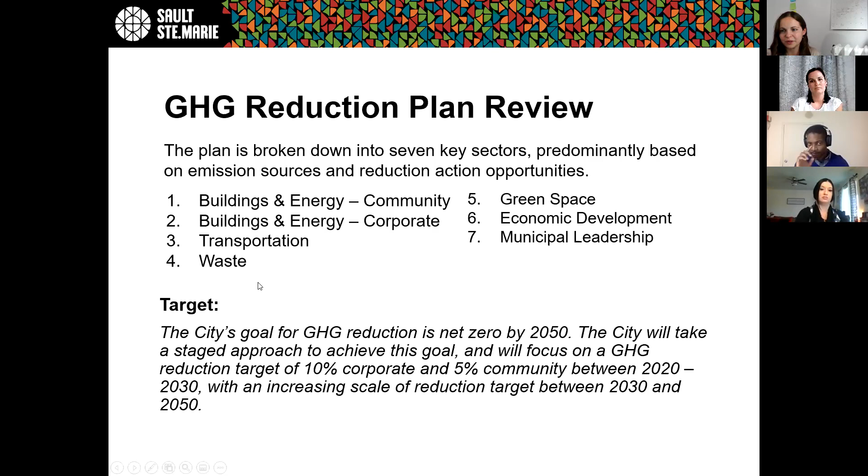A huge component of this plan relates to energy efficiency, which speaks very well to the presentation this evening. In addition to the actions identified, the plan also addresses a series of guiding principles. It speaks to issues such as affordability - when you look at reducing your energy costs, you create more economical housing. It also looks at creating accountability to ensure that we have a sustainable future for the next generations.

Education and awareness is a big pillar of the plan, which is what is so important about today. It also speaks to community pride, so by diversifying our sustainability options, we improve our community well-being. And of course, looking at clean tech and ecotourism as forms of economic development, and protecting our environment and habitat and species at risk from climate impacts.

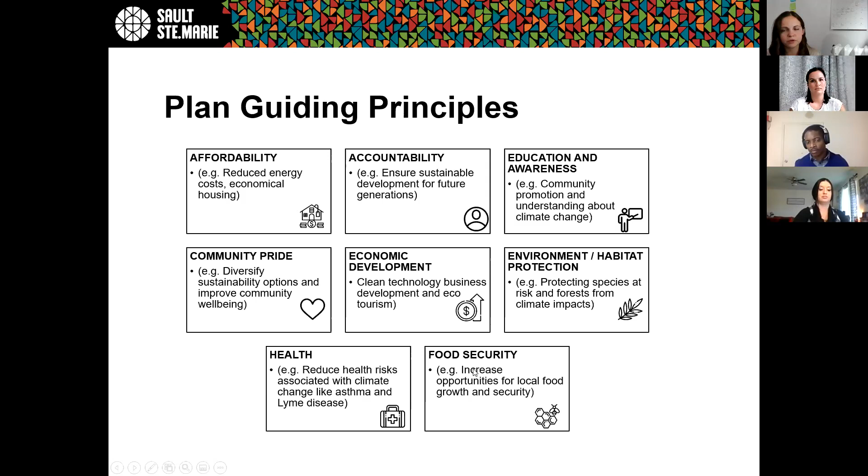Looking at health, by reducing emissions you can address things like asthma and Lyme disease, as well as food security. By growing food closer to home, you can reduce emissions from having to transport food here.

The plan is robust and has a series of priorities. This is just a high-level overview of some actions that have taken place so far. We've established an environmental sustainability committee that meets monthly and acts as the overseeing body of the plan.

We've created a climate information webpage on the city's website, and we're looking at budgeting and funding options for year one priorities, as well as undertaking a youth initiative within the community that addresses environment, and really prioritizing municipal leadership and policy changes, such as developing a climate lens policy.

On the emissions reduction front, we're prioritizing energy efficiency retrofits as well as zero emission fleet opportunities. We've summarized priorities by city department, and we're looking at increasing tree planting to help offset emissions, as well as developing a community retrofit program and streamlining our energy data tracking.

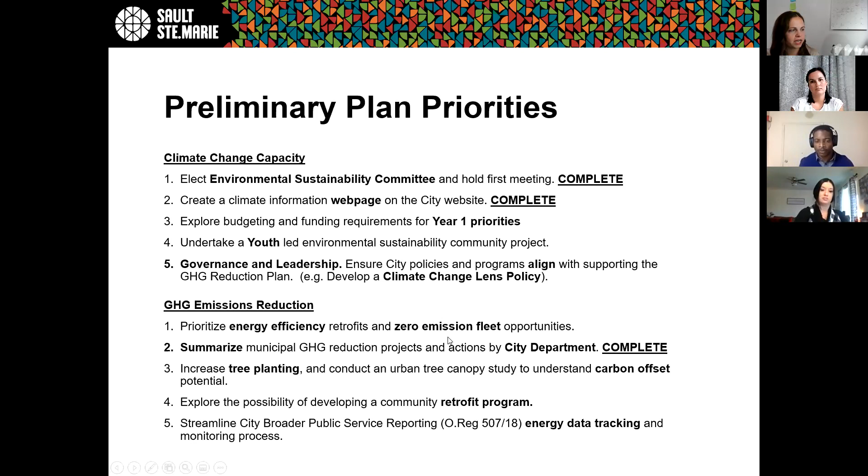Just a couple of highlights of things we're working on. The city does plan to go half electric for city buses by 2026. Next year we will be purchasing our very first electric bus and charger, as well as completing the infrastructure work. From a central administration standpoint, we are looking at installing solar panels at our bus depot for 2023.

As well as some retrofits at community centers, looking at lighting, heat recovery units, and energy efficiency equipment. From a waste standpoint, we've made changes to purchasing packages to reduce single-use packaging material, and our biosolids management facility will be expanding its scope to accept municipal source separated organics as required by the province.

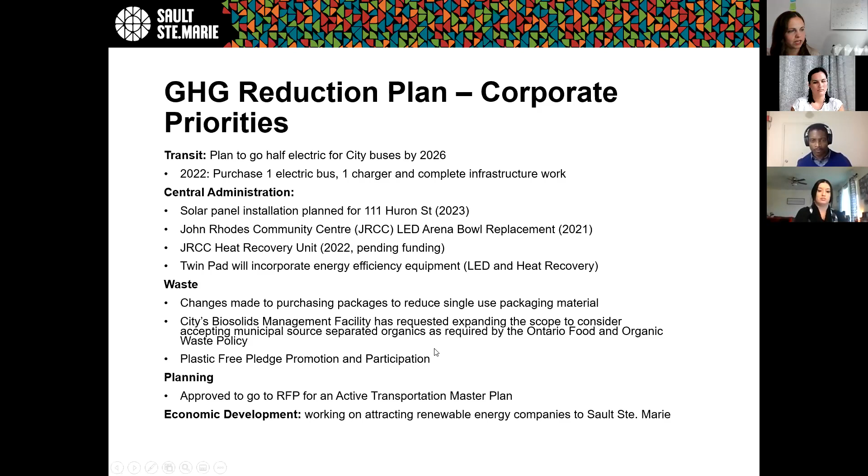We also have a plastic-free pledge, which we promote for participation within the community of Sault Ste. Marie, and we've recently gone to RFP to develop an active transportation master plan. Our economic development team is working at attracting renewable companies to the Soo.

So I know that was a lot of information jam-packed into a very short amount of time. If you'd like to learn more, I encourage you to visit the City of Sault Ste. Marie's GHG Reduction Plan tab.

So with that, I will stop sharing my screen here, and I will turn it over to Christy and Tia to provide you with an overview of some of the work that Garden River First Nation is doing as it pertains to their Indigenous Community Energy Plan.

Christy: Thank you for having us. The Indigenous Community Energy Plan was an energy strategic plan for Garden River with the support from the IESO, which is the Independent Electricity System Operator.

The purpose of the ICEP, which is what we call it, is to implement our current and future energy priorities, and to promote educational development and awareness programs that we have. A lot of the programs and things we've dealt with in the past were mainly focused on the residential aspects of it.

A lot of the ones that we dealt with were like the Ontario Electricity Support Programs, which is the OESP, the energy assistance programs, the home weatherization program, just to name a few. Those are ones that we had helped members of our community with, to get residential homes more up to speed on electricity.

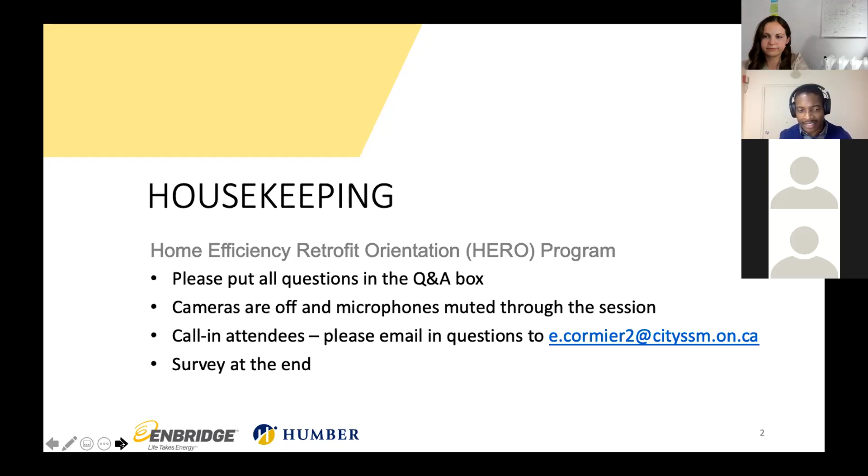So the first section is analyzing your home. In that section, I'm really going to talk about why home analysis, why the EnerGuide analysis, is really important. You'll hear me refer to that EnerGuide analysis from time to time, and I'm going to tell you why it's important and how you can get one of those done for your home.

Now, the second module we'll do this evening is really all about the outer shell of your home, something called the envelope. I'll tell you what that envelope really means, but I'll also tell you about your basement, your attic, your walls, and different things you can do with your home to make it more energy efficient and save you some money and energy.

Now, the third section is all about your mechanicals, and your mechanicals mean anything that has a moving part -- things like your furnaces, your pumps, your air conditioner, anything of that nature. How can you make those more efficient, and what products can you buy along with that as well? That is the third section. Between each section, there's a place to ask questions, so you may be able to get those questions answered as well.

Now, the final section is pretty simple, and that is all about how you manage a renovation -- an energy efficient renovation. If you're thinking of doing any of this type of work to your home, if you're looking for more information, rebates, or incentive programs, how do you get onto those?

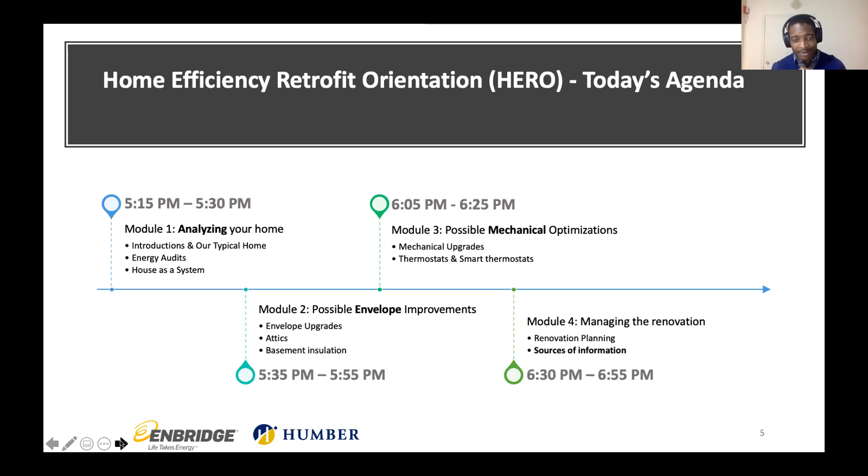So like I said, my main goal here is really threefold. The first thing I want to do is see if I can motivate you to take some action on your home, against the climate.

I'll tell you why that's important in a couple of slides. Secondly, I want to give you some information, to educate you on where you can find more resources to help you decide what to do with your home and exactly how you're going to do that. My third thing is to introduce you to resources that can help with the cost part of this type of work.

Any renovation is expensive, costly, and time consuming. I want to leave you with resources that can help abate that and get around it. So those are my three goals today. I'll revisit these at the end, and this is the entire point of my presentation today.

Now I have some outcomes that I want to ensure I hit. Those outcomes are to go over best practices, but most importantly, to recognize the benefits of doing any energy efficiency upgrades on your home or any space that you live in.

Most of all, I want to share with you the most high performance measures. There's several things you can do to your home, but I want to share the most efficient, the things that cost the least but bring the biggest savings.

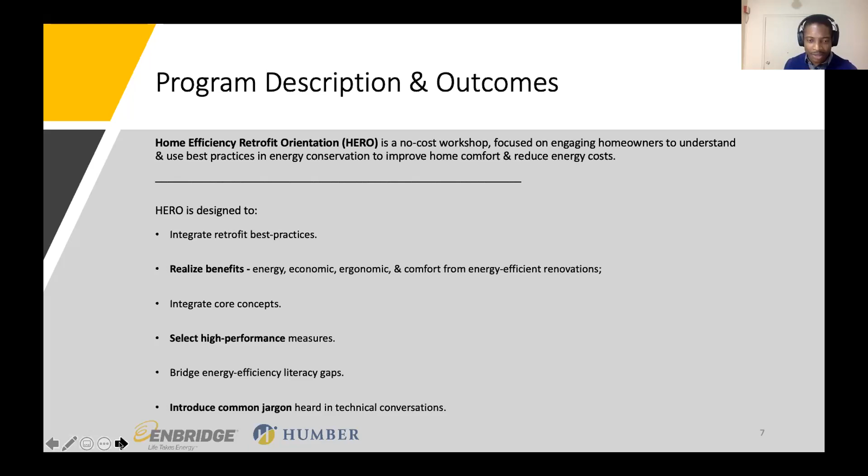On top of that, I also want to give you some jargon you may hear from techies and contractors referring to different things, and you may be wondering what that is. So I want to share some terms of jargon that you may come across as well. Those are my outcomes for today.

Now why all of this is important comes from the government of Canada monitoring emissions through the pan-Canadian framework, meaning all of Canada. They've been measuring those emissions, and they realized the targets set for 2050 are unachievable at the moment. If we continue on the path we're on, we'll be way above the greenhouse gas emissions we're targeting for 2050.

Because of that, you might have heard of some programs that target this directly. An example is roughly $7 billion set aside earlier this year to deal with energy efficient retrofits and upgrades across the pan-Canadian framework. So in the next few years, you're going to hear a lot of money sloshing around towards these energy efficient upgrades.

On top of that, cities and municipalities are going to be releasing their own plans as it trickles all the way down. An example of that were the two plans just mentioned before. I'll talk more about that later, but that's some of what you'll see.

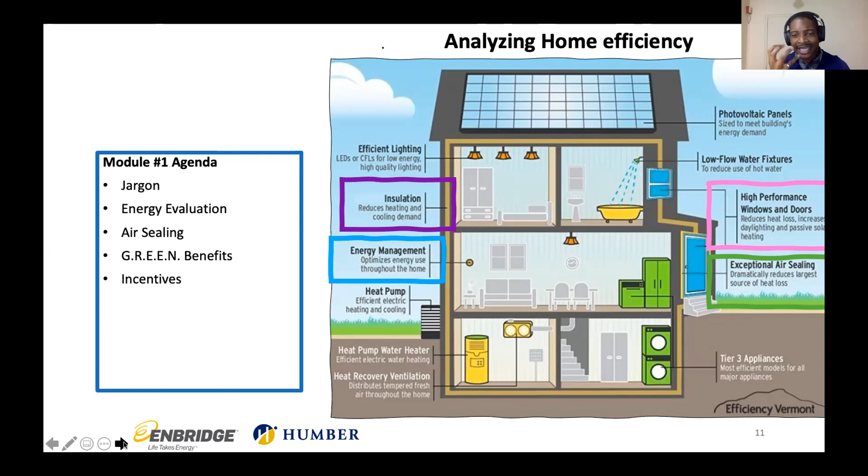Now, coming back to this diagram here in the middle of your screen, you have different pieces of equipment in your home, and each of those uses a certain amount of electricity and energy. What that is really measured in is a unit called a gigajoule. A gigajoule can mean anything - a certain amount of electricity, or 27 cubic meters of natural gas, or 72 kilograms of wood. Regardless of what it means, your home will consume that, regardless of the way it consumes it.

That gigajoule rating can be attached to your home, because that's on average what you will consume for the entire year. Now, the only problem with this gigajoule rating for your home is that you have to take electricity from the grid, and natural gas from the gas grid as well, or even if you have a tank or whatever source you use. And of course, there's a cost attached to that, right? In this particular case, all of the energy combined that you use will be given to your home as a rating.

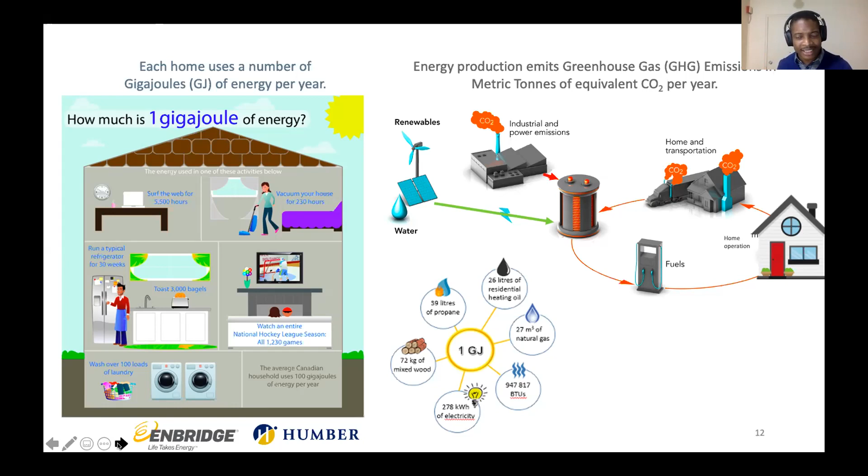Now, another thing that comes out of that EnerGuide assessment is it'll tell you where your energy is going. So it'll tell you how much you use on space heating, how much on water heating, how much on ventilation and air conditioning. It'll give you an itemized list of where you consume the most energy, and then you can use that to target the most energy-intense areas. This is what's called a housing information sheet.

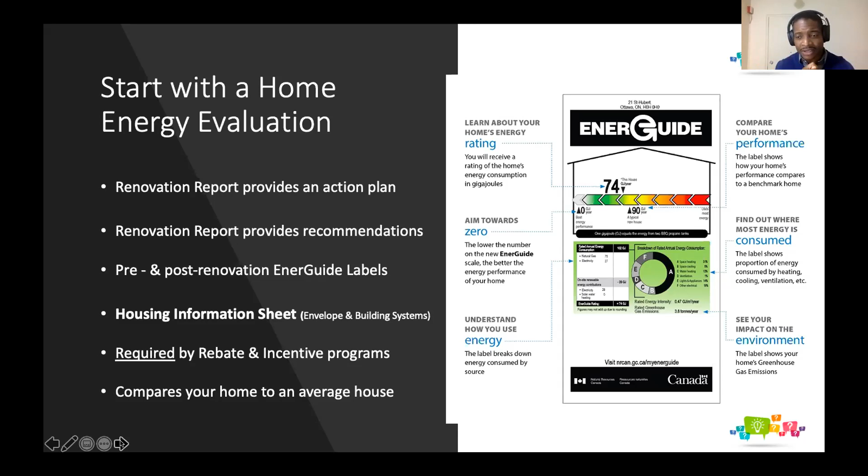This is your EnerGuide rating - that's the very first thing to start with. I have a little question I'll ask in a few slides, but before that, let me tell you what happens when you order the EnerGuide rating or assessment.

What really happens is the advisor comes to your home and attaches some equipment. This is tailored to you - you'll tell the advisor when you want this done, how you want it done, and they'll work with you on that.

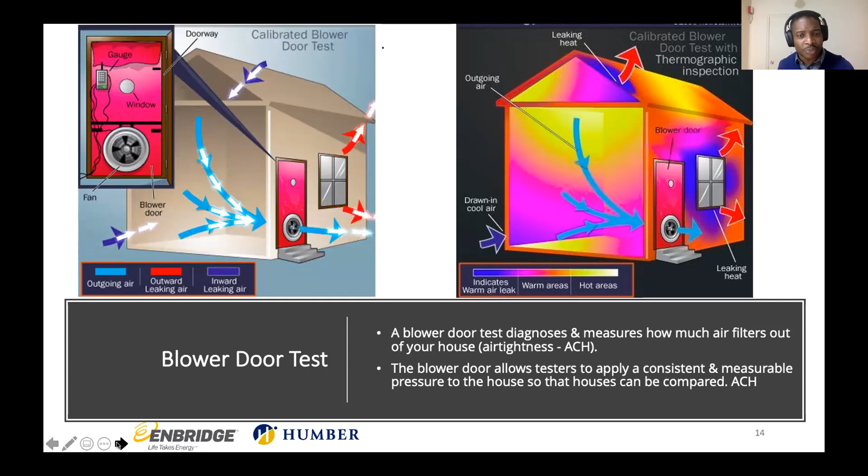Out of that blower door test, you will get an EnerGuide rating, and that rating will really tell you how much of your energy is going to space heating, space cooling, air circulation, and different parts of your home.

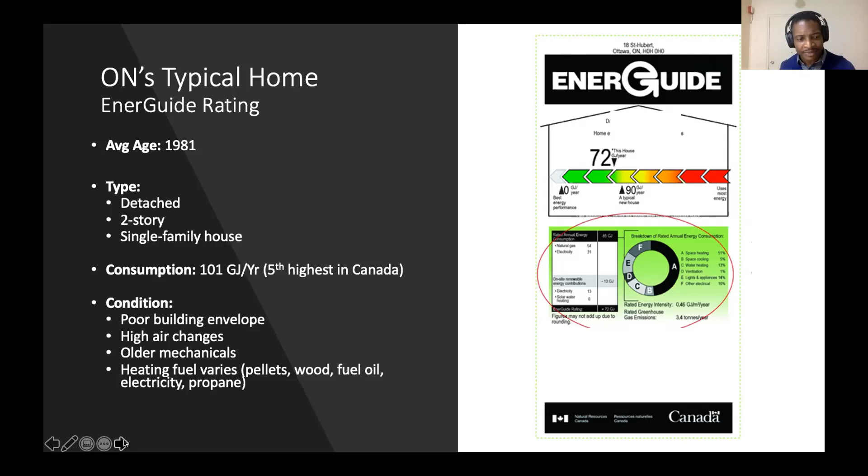Either raise your hand and we'll ask the panelists to raise their hands, or access the chat, or put thoughts in the Q&A function. My question to you is: what is the biggest barrier to improving your home's energy performance? What is stopping you from improving your home's energy performance?

Let's say by show of hands, if the thing stopping you is the fact that you just recently moved into this particular home. We'll ask for a show of hands. Yeah, there we go, there's a little icon at the bottom of your screens. Perfect, we have some feedback on that one.

Let's see the second reason: the biggest barrier to your home is contractor access. You can't find the contractor, you call them, you don't hear from them, they come, they give you a quotation, they don't come back, things like that. I saw some hands go up there. Okay, so that is also a problem.

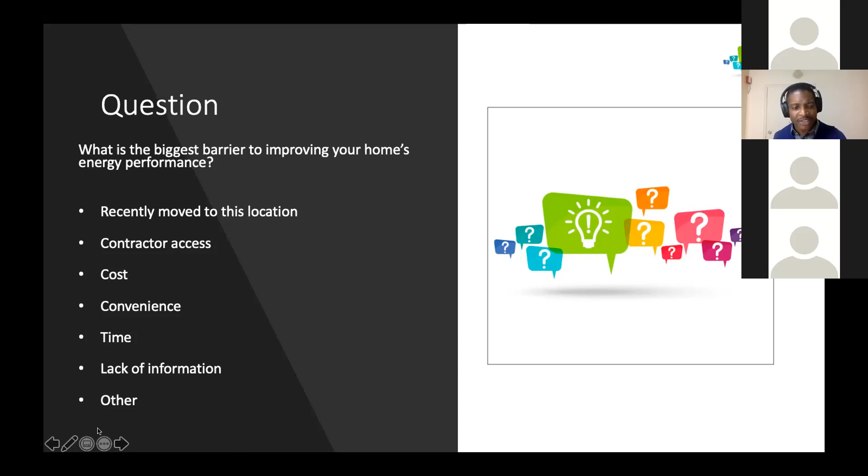Okay, thank you for those responses. Across the board, you have a number of reasons why persons have not really tried to tackle this type of work with their home. I'm going to try to assess and assist with some of these issues. The first one I want to address is lack of information, because I want to leave some information with you. But I also want to help you with the costs, and tell you about some rebates and incentive programs that may be applicable to you in your area as well. There are a number of these that I want to try to tackle.

Going back to the value of that EnerGuide assessment, it does a number of other things as well. It gives you an entire report.

You work with your advisor, and that advisor identifies the different parts of your home that are leaking. This may be something you already know, because you can feel the drafts on your neck, your ankles, your skin.

Another thing it does is suggest the best type of insulation to use. That insulation is based on your microclimate, the area you live, whether it's rainy, dry, or particularly cold, and how it suits your home as well.

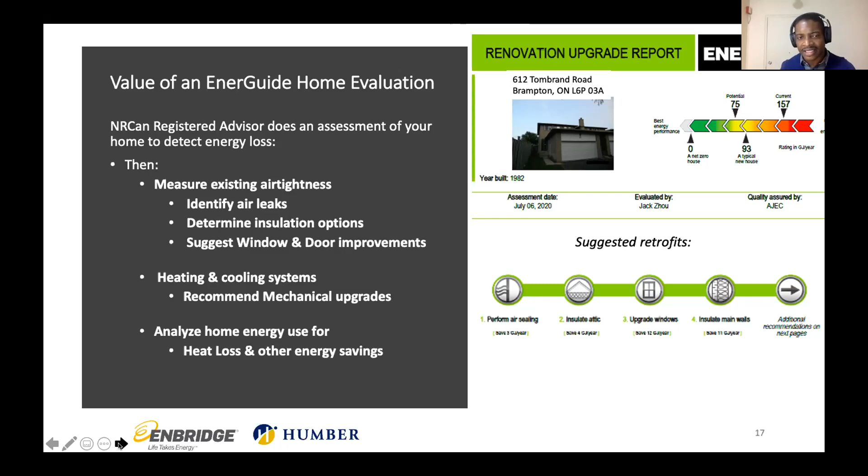Another piece of value from the assessment is that it tells you the best parts of air sealing to do for your home. Air sealing is sometimes, on average, responsible for about 20% of a home's energy loss. So that nice warm air coming from your furnace, all the money you spent on that, 20%, 1 in 5, is going right out through the window. If you can keep that in a bit better, you can essentially save energy and save money in the process.

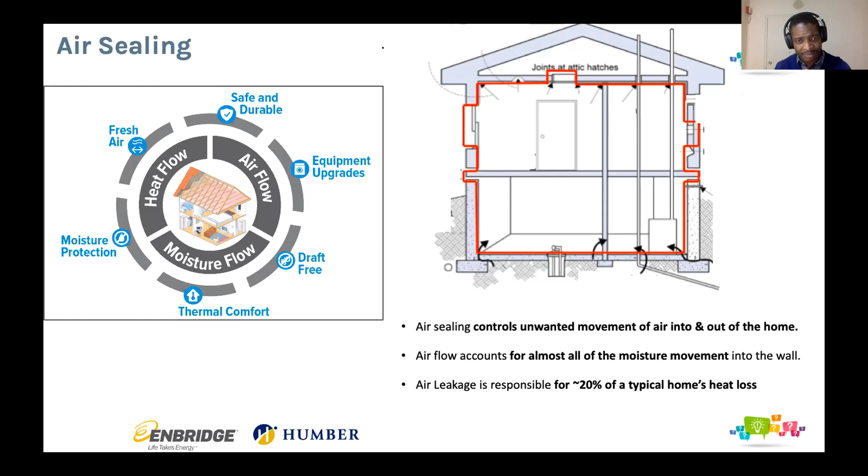These are some of the benefits here on the left of air sealing. Now, air sealing can essentially be done yourself.

But before that, I want to ask you a question. Do you think your home is well insulated? Let's say by a show of hands, who thinks their home is very well insulated? Okay, so we have 2%. Do you think your home is well insulated? Perfect, okay.

Let's see the persons who do not think their home is well insulated at all. Marcus, just to add, we have a comment in the chat saying we need an option for no clue, because perhaps some folks don't know. I see, okay. Well, poorly insulated would probably mean your home is very drafty, you set the temperature higher and it's still not picking up that heat. You have to set it very high to maintain or retain that heat, and on top of that, you spend a lot of money doing that, it's very costly. That is poorly insulated. Every time the wind blows you can feel it coming through the windows, or you see your windows condensing and fogging up, things like that.

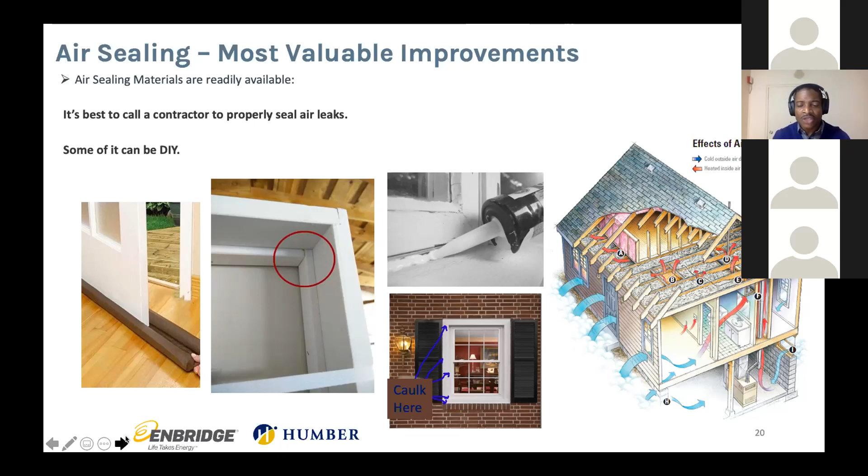So in this particular case, the home is not doing a very good job of heating at all, and that's costing the homeowner quite a bit of money. So if you're able to tighten up on that air sealing a bit, that will actually increase your home's efficiency. Now, the benefits of doing that - it'll help reduce the money you spend on heating.

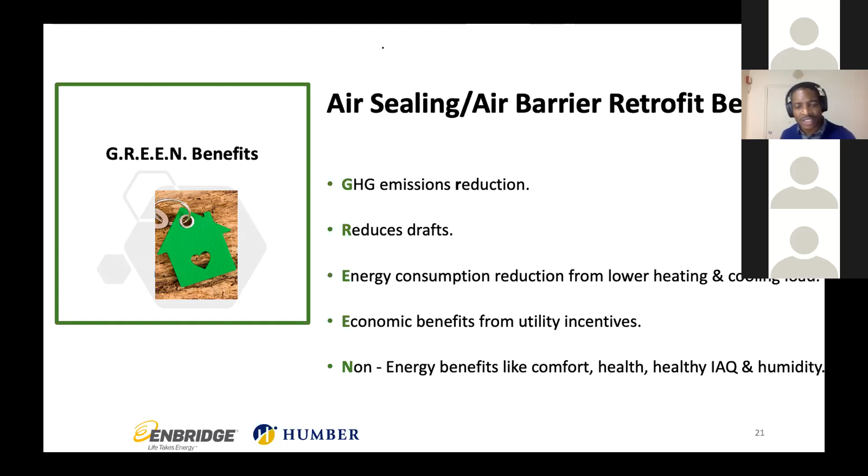On top of that, it's a bit more healthy - you'll feel more comfortable in your home, you'll feel better about it. And on top of that, you reduce your greenhouse gas emissions. You save energy doing that, and energy is directly linked to greenhouse gases. You're better able to manage your home in terms of temperature and the settings you choose. There are other benefits as well.

Now, one thing I want to preface, like I said, is that there are some incentives out there. An incentive means you're paid to do this work upfront, and then you provide evidence that the work has been done. A rebate is where you do the work first, then apply for the rebate after, and they say, okay, well done, here's your sum of money. That's the difference between the two.

And for air sealing, there are quite a few incentive programs out there. One example is the Greener Homes program - that's a federal program. Through the Greener Homes program, they have a number of different incentives. You just have to go onto their website, look for that information, and apply based on your scenario.

Now, like I said, for any incentive or rebate you're applying to, you have to provide proof of two audits - a first audit and a second audit. The first audit will tell you what you consume at the moment. The second audit will tell you what you consume after the energy efficient upgrades have been done to your home. It really just compares the two.

Now, I'll get into the cost of audits in the next section, but it's essentially roughly about $600 for the two of them. On top of that, there are some rebate programs that will refund you up to about $550 of that. So you're essentially getting two audits for $50 if you apply for these incentive and rebate programs. So you have to definitely look for that information, find out more, apply, send in your application - that can help you with the cost. That was something we determined earlier was a barrier to doing this type of work, so we want to remove that barrier a bit.

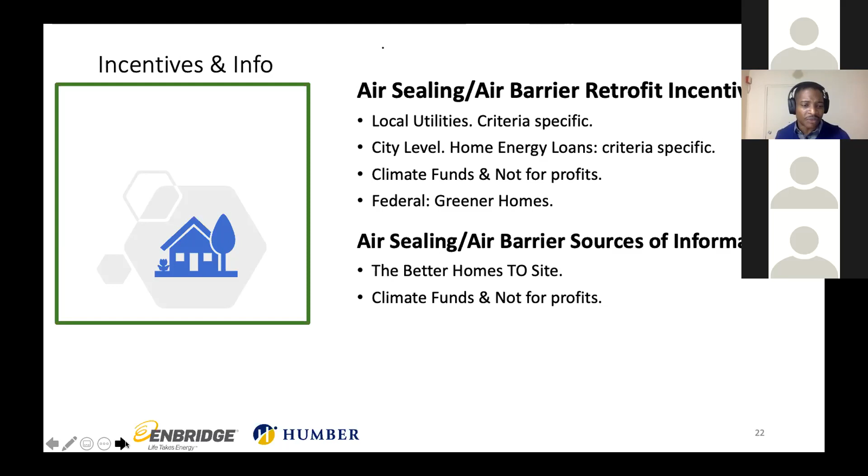Now, one thing I don't want you to worry about as a homeowner is trying to take these notes, because you'll get some handouts with all of this information on it as well. So even if this is something you're interested in doing with your home, you'll get a handout that will help you find where all the information should be. That will be sent after the session.

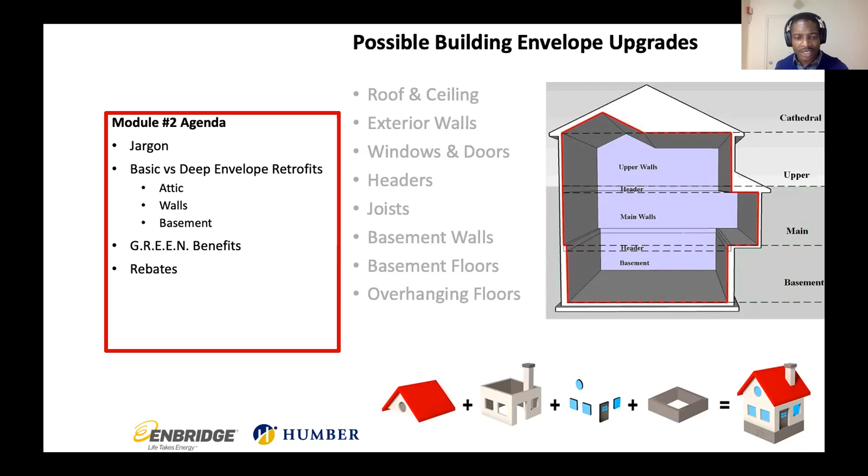So, like I said, the building envelope really just has three functions. It provides support to your home, it regulates the internal climate, and on top of that, your envelope is what you put things like your siding and finishing on. That's really what gives your home the look and feel that it is.

Now, I mentioned air changes per hour earlier, and that's really all about air sealing. How well is the air staying in your home? That's particularly important.

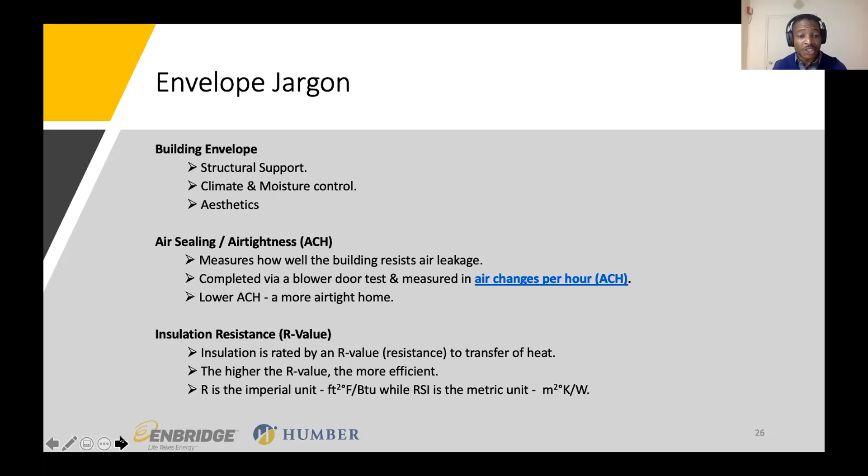Final piece of jargon you'll hear: R value. R value just means resistance. So going back to that same envelope in your home, how well can it resist that warm air on the inside from getting outside? How well can it keep it inside? That's really what your R value is about, how well your insulation is doing its job. And that's particularly important because it will also directly affect your efficiency.

So the insulation is twofold here. It divides the different parts of your home, different rooms and such, but it also stops heat from escaping during the winter, and vice versa in summer. That's particularly important for the efficiency of your home.

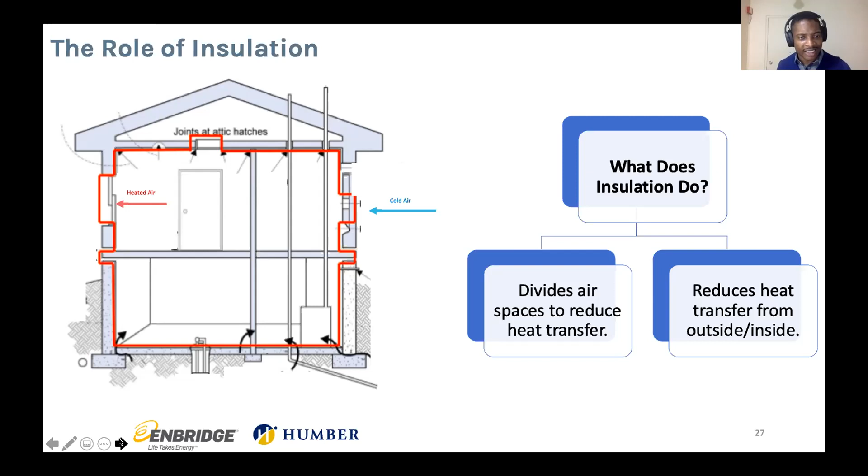Now, NRCan had a test case. They bought a random house, roughly in the center of Ontario, not necessarily northern Ontario. In this case, they tested all the systems and came up with a gigajoule rating for this home - roughly 147 gigajoules per year. So quite intense on the energy scale here - that's pretty up there, uses a lot of energy.

Those are some of the main things they would have done to this home. The result was that they got that 147 gigajoules per year down to 113 gigajoules per year - quite a bit of energy savings in this particular scenario.

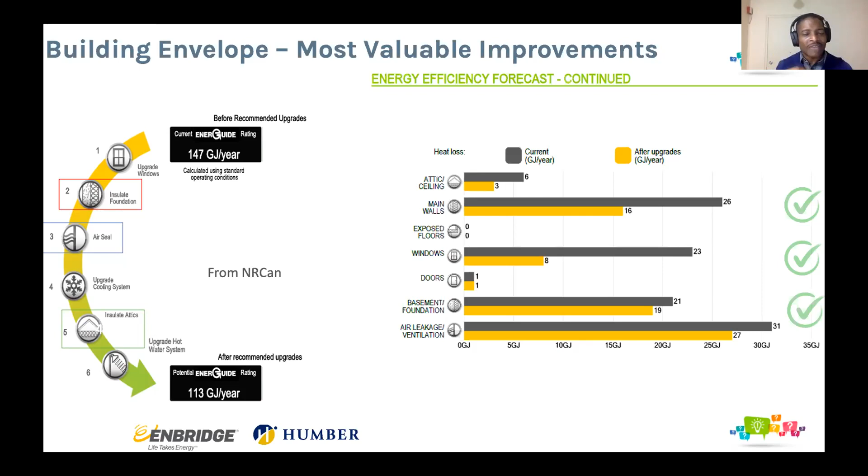Now, one thing they did with this home after getting to 113 gigajoules per year is another retrofit - a deeper dive. It now made two completely different examples: one is the base case where they got to 113 gigajoules, and the other is the deep retrofit where they got down to 90 gigajoules per year. So for deep retrofits, you're going past the boundaries - surpassing them, doing even more in-depth work.

Now, I have a bit of a question here, and this will help me understand more about what's going on with homes. Have you ever done an energy audit in your home? An energy audit means you reached out to Natural Resources Canada and said, hey, I need an energy audit done - this is for any type of energy work. So let's see by show of hands, who's ever done that?

See? And then the opposite of that, who has never done that? Okay, we have quite a few participants raising their hand. And is there any person that thinks it wouldn't make sense for them?

I have some feedback on that one as well. I wanted to go through the audits a bit more. They had two examples coming out of that home. The first one is where they did just some basic updates and upgrades in terms of energy efficiency. The second one is where they took it even further and did the best possible job they could do. The first one was baseline retrofits, the second was deep retrofits.

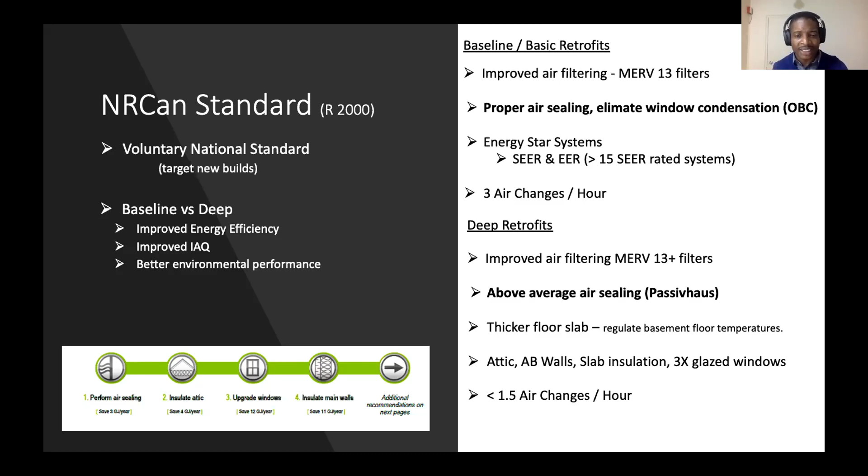For the baseline retrofits, they went with pretty standard basic equipment and got down to 3 air changes per hour. With the deep retrofits, where they did the best possible job and used the best materials they could find on the market, they got under 1.5 air changes per hour. The home was very well insulated and performing well in terms of air sealing. They did that by looking at different parts of the home and choosing the best insulation for each part. Each part of the home requires a different type of insulation, and each different home requires different insulation as well. I just wanted to share some examples that could be eligible for you.

Insulation can be a do-it-yourself job if you're interested. But there are things to think about, like the location of your electrical plugs and wiring, fire safety, noise, rodents, and moisture. There are several things to consider when doing insulation work, so it may be better to get a contractor to help. Regardless, insulation for your home stops outside air from getting in and indoor air from escaping. It also balances the moisture in your home, because as we saw with that earlier example, moisture from the snow was getting into the home and taking away a lot of energy. That's one thing to be mindful of.

Some examples of insulation available to you: spray foam. Spray foam is a special application of foam that requires taking apart the entire envelope to apply. But once it expands and fits into place, it really increases your R value. Remember, R value is your resistance value. It keeps your air nice and well sealed, keeping the warm air inside and the cold air outside - that's what you want.

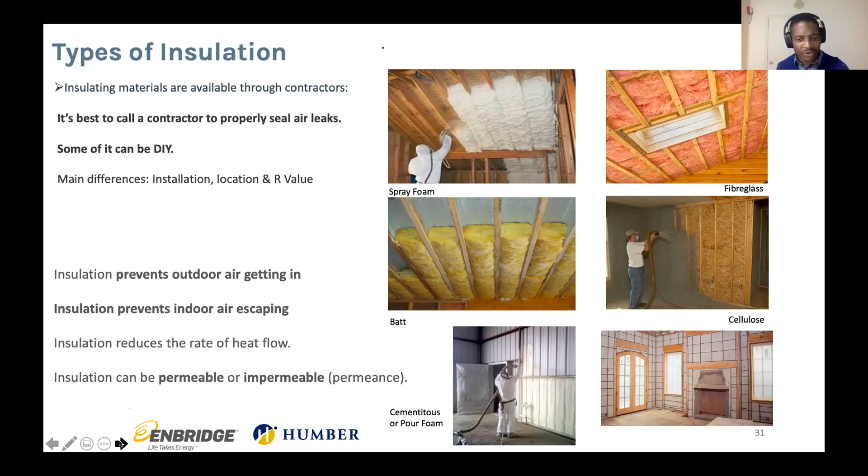So there are several different options of insulation available to you. This is just a fraction of them. It really depends on your individual scenario, and it's probably best to work with a contractor who can explain your scenario individually.

It could also be shrink wrap over some of your windows. That's another option that can help, especially if your home is particularly drafty, if you're feeling a lot of air coming into your windows and you're not ready to change them just yet. Shrink wrap is really just a clear sealing that goes over the window to keep the window from transferring air through its frame.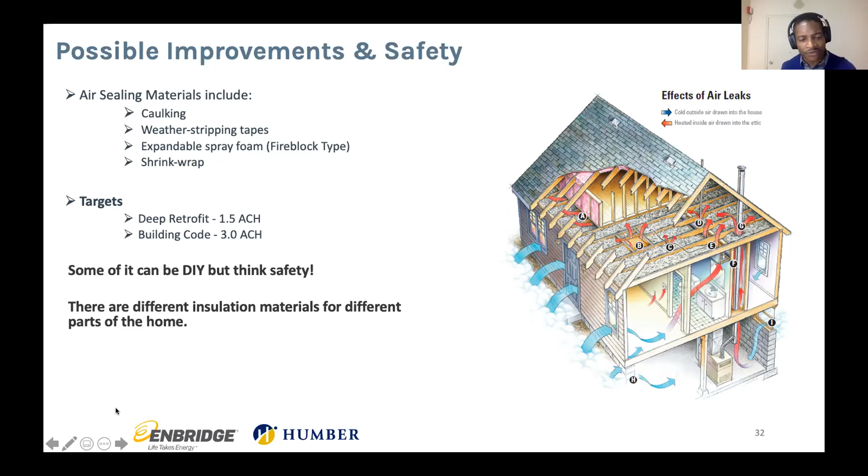So like I said, there are different types of insulation materials for different parts of the home, and each one will function differently based on the scenario.

Now I want to speak to you about your attic as well. Your attic is particularly important because, remember, from the furnace it's coming nice warm air. But that warm air rises, so it's going to sit just about roof level as you're seeing here on the right. And if your attic is not very well sealed, that warm air is going to go directly out through the roofing frame.

And you're going to lose a lot of energy that way. One way you can tell this is happening with your home is in winter, if the snow is not melting, or if you see a lot of icicles coming under your eaves. That's probably what's happening there, because your home is losing a lot of moisture through that warm air, and that warm air is freezing as it escapes through the attic and different parts of the roofing. That's not something you want, because that is nice warm air you paid for.

So you don't want that escaping, you want it to stay inside as long as possible. Now, another thing you can do with your attic is to reduce thermal bridges. What I mean by thermal bridges is shown in this image on the right, where you see the wooden rafters going through the insulation. Those are thermal bridges. What happens with that insulation as it is, you'll actually get a lot of energy going between the rafters and lose a lot of heat that way. The best thing to do in that case is to have more insulation over the rafters to ensure the home can hold its heat much better.

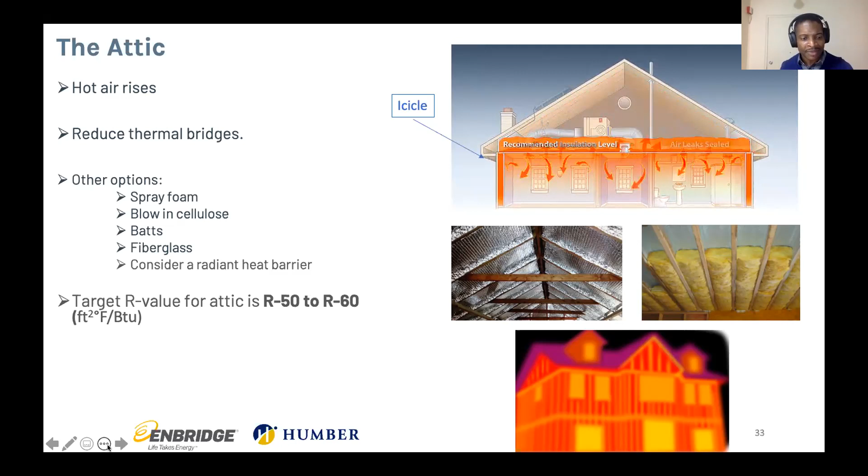Right, and that's for the attic. The next part of the home here is the wall. And the walls do the same thing that the envelope does: they keep the outside climate outside and the inside inside. It really helps separate the two. The type of insulation will really determine how well your wall performs in weather conditions. There's several different options, like rigid board, blown-in cellulose, spray foam, and those options will be based on the construction of your home.

You can see here on the right, you have some retrofit options, and that just means the home has already been constructed, or it's an older home, and something needs to be done about the energy performance, and they're coming with a solution that works for that. So there are some new builds, and there are some retrofit solutions as well. This really depends on what you're looking for in terms of your energy performance.

Now, based on that NRCan case, the target for walls, and that's above grade walls - that's why you see that little AG there, the walls above the mud, not your basement - those walls should be between R20 and R30. That's the best R value you can get for your home to be considered efficient.

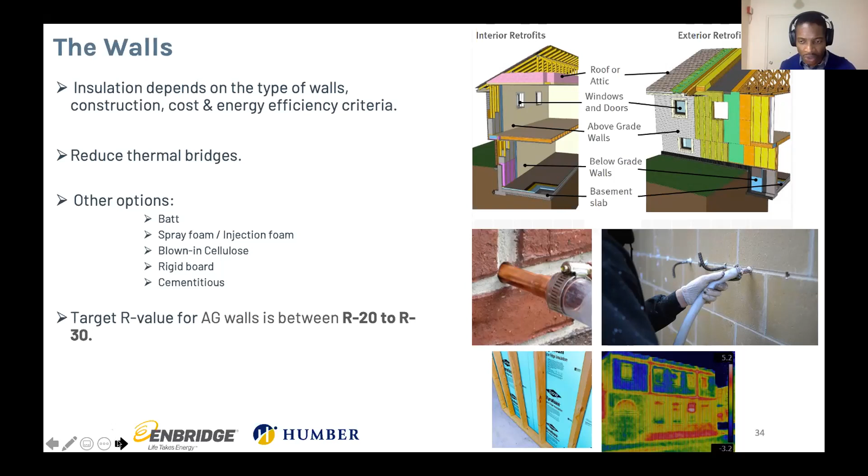Now, this particular example here, bottom right, you can see through this home's wall. On the left, you have a door. But on the right, you can see that the home is losing a lot of energy, the red areas through the walls. This is something you don't want because that will cost you quite a bit of energy, and that energy will cost you money as well. So that is not something that you want for your home.

Now we go on to the below grade walls, the basement walls. The below grade walls are essentially very similar to the above grade walls, but they operate a little bit differently. The main difference is the fact that they're sitting in quite a few meters of mud. That mud has moisture, and that moisture will get into your home. Apart from causing all sorts of issues with vermin, mold, that kind of thing, it will also rob you of your energy. And this is not something that you want as well. So for your below grade walls or basement walls, you have to ensure those are very well insulated as well.

Now for NRCan, they have several different options you can use for this: things like basement blankets, rigid board, blown-in cellulose, batt insulation, spray foam, other different types of insulation as well. One thing you have to do with this type of work is ensure your basement floor is well insulated as well.

Now, I'm not sure if you've experienced this, but sometimes you may go down into your basement and you're walking on the floor and you're just thinking to yourself, my gosh, this floor is terribly cold. Well, if that is happening to you, it probably means you're losing a lot of energy through that cold slab. And that's robbing you of your energy as well. That is a very major problem for homes - they lose a lot of energy through the basement slab. That's not something you want for your home either.

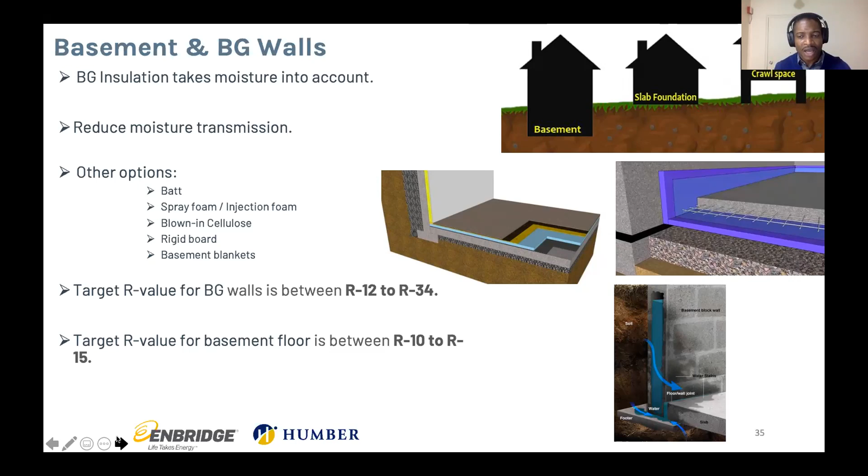The benefit of doing that type of work to your home helps reduce your energy consumption. You can get an increase of 10% for your attic, 30% for your walls, and 35% for your basement. That's quite a bit—roughly 70 to 75% improvement, a large jump just from those 3 upgrades I suggested.

On top of that, if you're ever thinking of selling your home, this helps with its value. The housing market in Ontario is quite popular right now—homes sell within months or even weeks depending on location. All of this helps reduce your energy consumption and greenhouse gas emissions, and your home becomes more comfortable, with more stable temperatures since it's not as drafty and you're not losing energy through your walls. That's particularly important for a properly functioning, energy efficient home.

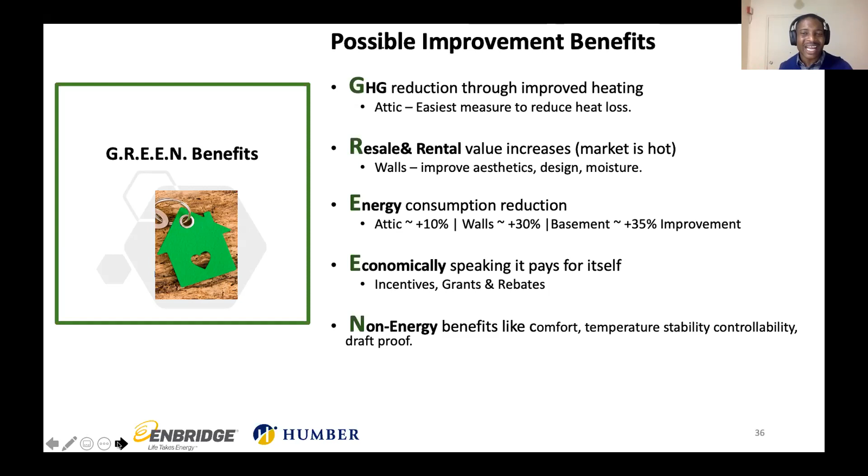Now, an example of some rebates here. If you're an existing Enbridge customer, you may be able to tap into those rebates. The very first audit is roughly $400, and the second audit is roughly $200 for this type of work if you're applying for incentives or rebates.

Enbridge gives up to $550 for those audits. Once you provide your receipts, proof that the work's been done, and the reports, they'll send you a sum of $550, and you would have paid $600 for this—so this is essentially 2 audits for the price of $50. That's only if you're an Enbridge customer.

There's also some other information in the chat box that Emily sent over, so there should be more information there as well. There are other incentives and rebates floating around out there, and it really depends on what you're interested in doing with your home. I'm trying to share with you the best upgrades you can do, best bang for buck.

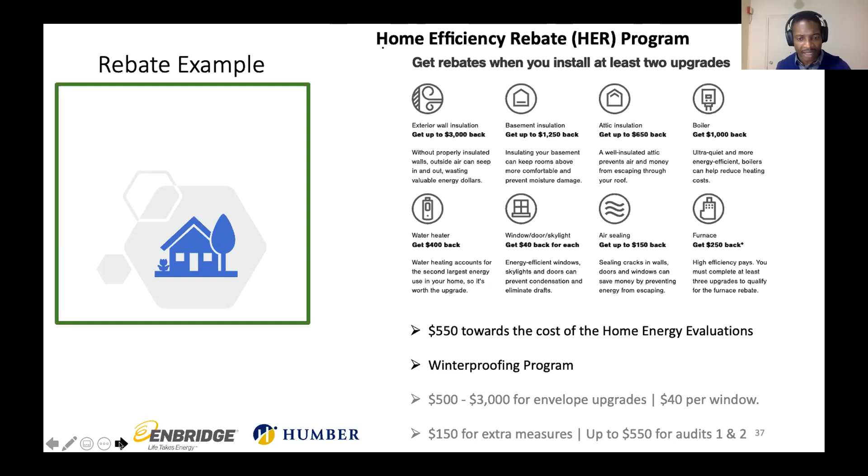Some sources of information I want to leave with you for this section: the Save on Energy Affordability Program, which is Ontario-wide, not just Southern Ontario; the CMHC, Canada Mortgage and Housing Corporation; and the Greener Homes NRCan site as well. Further down in the presentation, I'll give you more sources of information, so you'll have several opportunities to take notes. I'll also send you some handouts summarizing all of this.

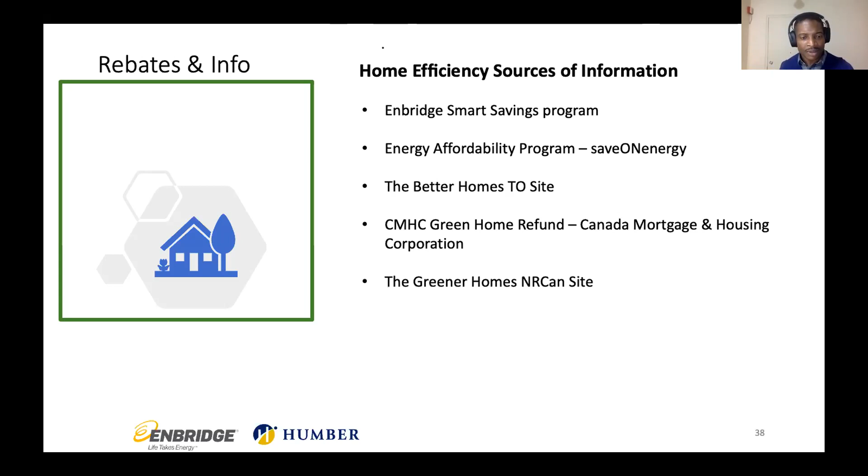All right, now let's see if we can go ahead—do we have any questions that came in? We do, Marcus. There was one question about whether there's a link to book the energy audit with NRCan.

It's on the website—when you go there, search for EnerGuide evaluation, and it'll take you directly to the link. There's a search bar in the top right. You go to that, pull it up, click on it directly, send them your information, and go from there.

So my understanding is you have to create a login in order to apply—is that the first step? Then after creating a login, you can log in through either your financial institution or a Government of Canada ID, and fill in the next steps to do the audit, correct? Yeah, I think it's a GCKey. Essentially the same site, yeah.

So what I'll do is put that link directly into the chat for the individual who asked that question, and that'll take you directly to the GC website to fill that in. In the meantime, are there any other questions? Right, yes, are there any other questions? Just pop those into the chat or the Q&A. Okay.

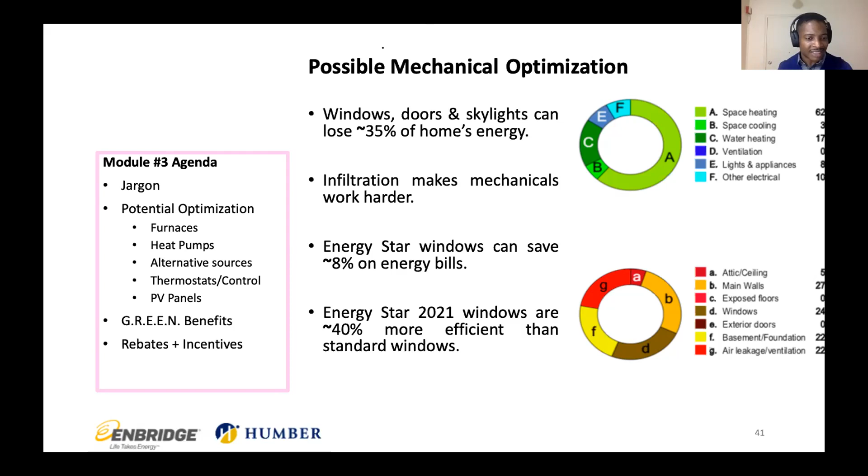It really is up to the homeowner. So that is something that I wanted to preface there, and that is something that has to balance out as well.

Now, some jargon that you'll hear me refer to in this section. When I get to air conditioners, you'll hear me talk about the EER, the energy efficiency ratio. That's really about how well the particular piece of equipment, usually the air conditioner, is cooling the entire room. You may also hear me refer to a ton, which is just a measure of heat or cooling capacity, equivalent to roughly about 350 birthday candles lit for about an hour.

You'll also hear me refer to a British thermal unit, which again is a measure of energy, and it usually measures how well a heating system is heating a particular room. The British thermal unit is the equivalent of one birthday candle lit for one hour, so you can put that into perspective and think of how much heat that will give you.

You'll also hear me refer to AFUE, the annual fuel utilization value, or annual fuel utilization efficiency. That's really how well your furnace, or whatever piece of equipment you're using to heat your home, is doing its job. If that furnace is using any type of fuel, how well is it combusting that fuel? There are some that are better than others, simply because of the way they're constructed and designed. So that's one thing you need to take into account - a higher AFUE is better than a low AFUE.

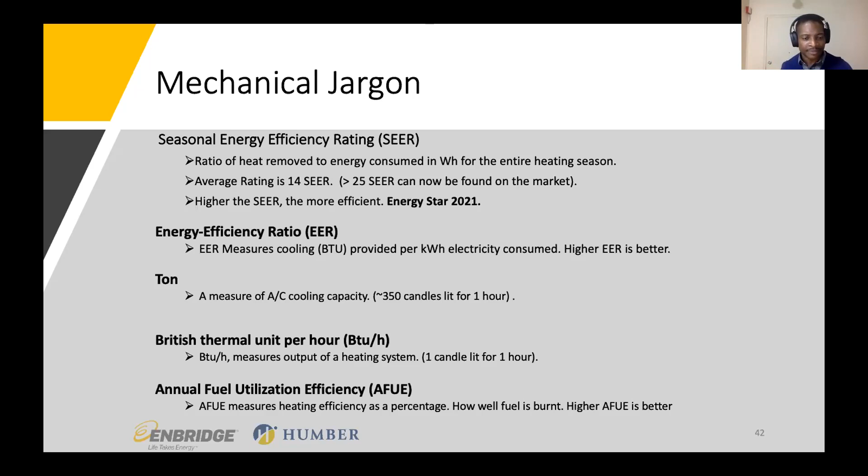So moving along, in that same NRCan test case, they made quite a few upgrades. In this particular case, you can see they did some upgrades on space heating, and got the space heating down from 101 gigajoules per year down to 23 gigajoules per year - an absolutely huge, amazing savings. And for water heating, they got it down from 25 to 5 as well.

For water heating, one thing you can consider is instead of having a water heater with a tank, you can have an on-demand water heater, called an instantaneous water heater. That's just as you use the water, that water is heated - usually it works off of gas or propane, depending on which one you get. So instead of having a big pool of warm water sitting in your basement in a tank, you can essentially heat that water on demand. It's much more efficient, simply because if you have a large tank of hot water sitting in your basement, you have to keep it hot, meaning you're using energy to keep it hot continuously. That's a huge waste, and that's essentially where you can get some of these savings.

For space heating, it really depends on a number of things: the equipment you're using to heat the space, the fuel you're using, and then the actual space itself. Is the warm air going out? Is it going through the attic? Is it going through the windows? Where's the air going after that? That's particularly important. So there are a number of things that are important to us that we'll look at as we go through this section.

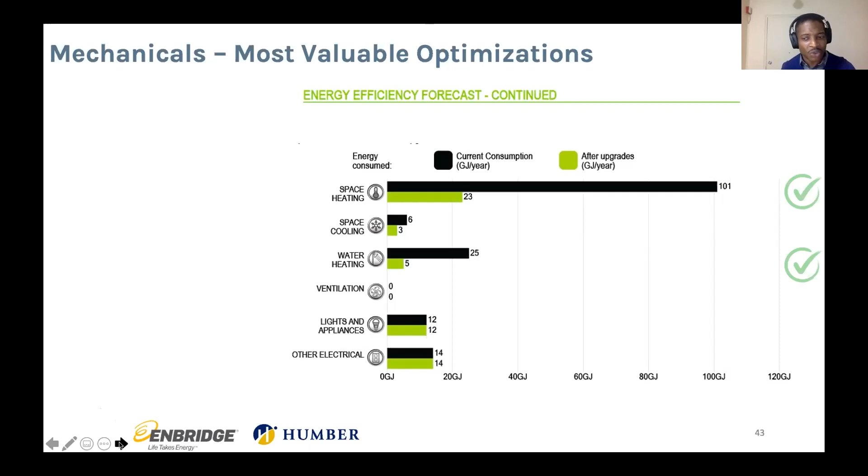Now, the first thing we want to look at here is furnaces. You saw that the average home in Ontario was built in 1981, and if the mechanicals haven't been replaced since then, any furnace over 9 years old is roughly about 60% fuel utilization efficiency. That just means 60% of the fuel that furnace is consuming is actually combusted - the rest is wasted in some way. That's particularly wasteful, and not something you want for your home.

The target fuel utilization value for furnaces, especially for Energy Star furnaces or any efficient furnace, is more than 95%.

That means in that particular case, almost 100% of the fuel this furnace consumes will be combusted. Why that's important is because that fuel forms the heat for your home, so you want to burn as much of it as possible, and burn it as well as possible, so that heat can be delivered directly to where it's going to be used - your home. You don't want to lose that heat before it's delivered into your home. That's particularly important.

One thing that can help you understand the size and type of furnace you should use for your home comes back to the EnerGuide evaluation. In that evaluation, you can ask the advisor for a sizing calculation, the right sizing calculation - it's a little long-winded, but the person will know what you're speaking of. It's called the CSA F280-12 calculation. You should ask your advisor for that if you're having an EnerGuide audit done.

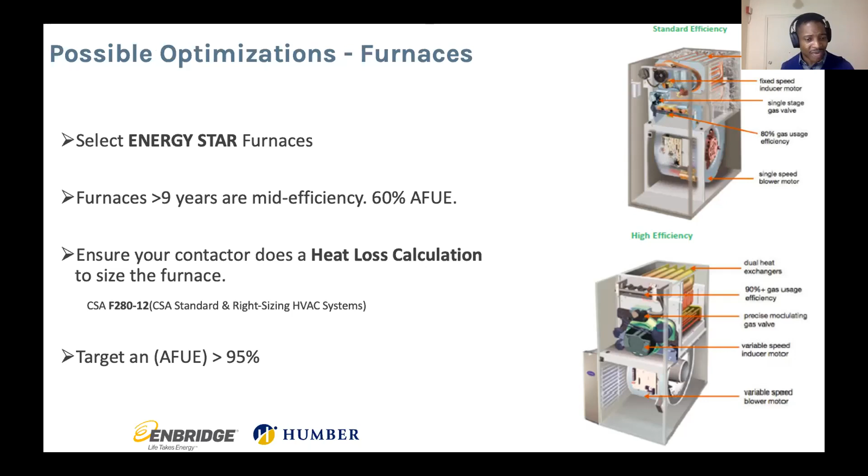If you buy a furnace too large, it's going to consume more energy. And if you buy a furnace that's too small, different parts of your home are going to be cold. So you want to ensure it's sized directly to your particular home, its size, and its use.

Now, with Energy Star furnaces - here on the top right you'll see a little tag in the marketplace on some of these furnaces that says Energy Star 2021 Most Efficient. Those are the newest furnaces on the market, and they have a number of different features.

The first thing they have is two heat exchangers instead of one. Where the fuel is actually combusted - this is for fuels like propane, methane, natural gas, any of those, not wood or heavy oil - instead of combusting that fuel once, it actually combusts it twice, and takes the heat out of that double combustion twice. So you get more heat, a better burn on that fuel.

Another thing some of the more modern furnaces have is an exhaust fan, which helps take those waste gases out after the combustion process has finished, because that's air you can't do anything with. So taking that air out makes the furnace a little more efficient as well.

One thing the sealed chamber for combustion really helps with - if you look at some of the older furnaces underneath, you'll see a flame. That flame is the pilot. That's consuming fuel, and little parts per million, little particles of that fuel being combusted are floating through the air and getting into your system. That's not something you want to ingest or breathe in. So for the newer furnaces, they have a sealed combustion chamber, which helps deliver more heat and is better for the air you're breathing inside your home.

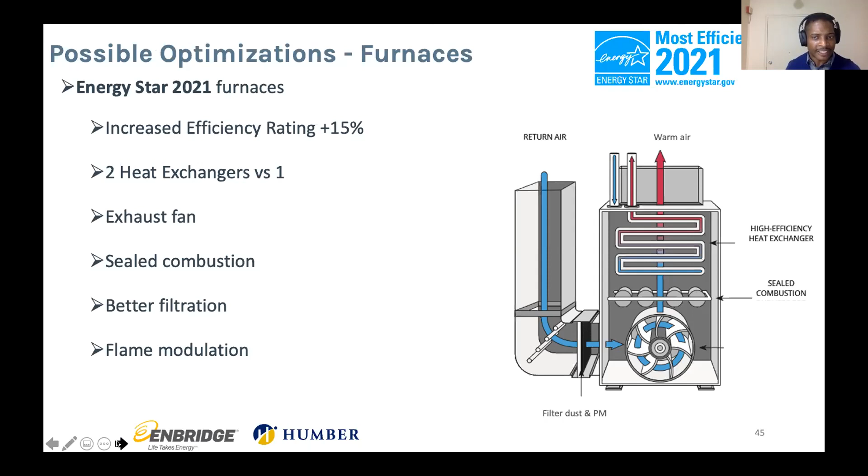Now for the air conditioning units, you'll also see this tag on the top right on some of the newer air conditioning units, Energy Star, most efficient 2021. What happens with air conditioning units is that they carry a refrigerant, and the refrigerant is what really allows them to cool. The refrigerant absorbs the heat that's in your home and takes that heat and puts it outside.

There are a number of different refrigerants you can use to do that, and some refrigerants are better than others. If you remember, in the early to mid 2000s there were some refrigerants that were banned, because they were just terrible for the environment. They were depleting the ozone layer, causing problems with different animals, birds especially, and doing a number of harmful things to the environment.

One thing that happens with the newer furnaces is that they use better refrigerants, more eco-friendly, and on top of that more efficient refrigerants as well. So the difference is between refrigerant R410 and R32, a bit of an upgrade, which helps the piece of equipment work better.

Another thing that happens with the newer furnaces, referring to the global warming potential, is that they have a better heat per watt rating. It means a smaller amount of refrigerant can hold more heat and transfer that heat more. That really means you'll have to do less work in your air conditioning unit to remove the heat from your home, and that will mean you use less energy doing that.

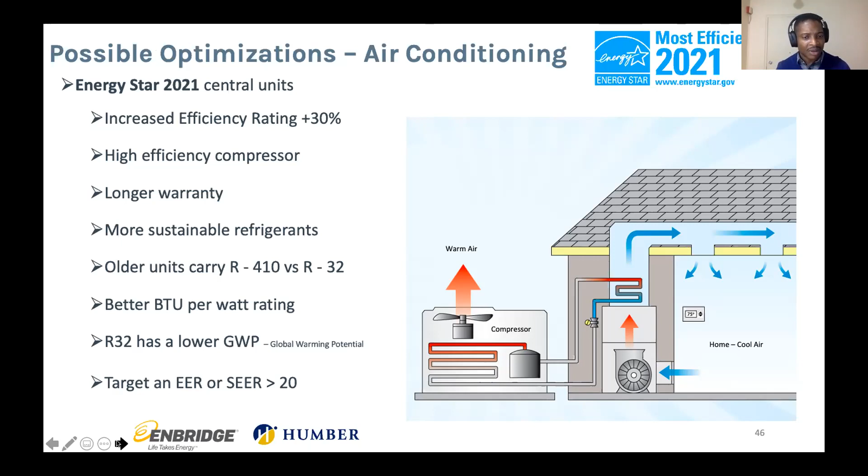In this particular case, it's saying that if you get one with an EER above 20, your home can be considered energy efficient. Usually in that case, the efficiency rating increases by 30% or more, and that will help you with savings all across the board on your home, especially in the cooling season, summer season. As you know, our summers are getting a bit hotter.

Now, this is the part where we get into a bit of alternative heating sources, and one such alternative is a heat pump. A heat pump is very similar to an air conditioning unit, but it's able to work in reverse. So what this does is heating in winter and cooling in summer as well.

And in many cases, they're designed specifically for use in Canada. They're designed with the climate here in mind, especially in Northern Ontario, and the different zones—Southern Ontario, Eastern, Western—different parts that different products are designed for.

On top of that, another thing a heat pump can do is take heat from various alternative sources. Some heat pumps can just take the air around it and draw the heat out of that air and put it into your home. That's essentially free heat that you're getting.

Another thing is that sometimes you can take the heat from the mud around your home, or the mud that your home is sitting in, and put it into your home, because the mud stays at roughly 12 degrees all year round. So if outside is minus 30 or so, and the mud is roughly 12 degrees, that's quite a bit of energy you can harvest and put inside your home. That's also free energy.

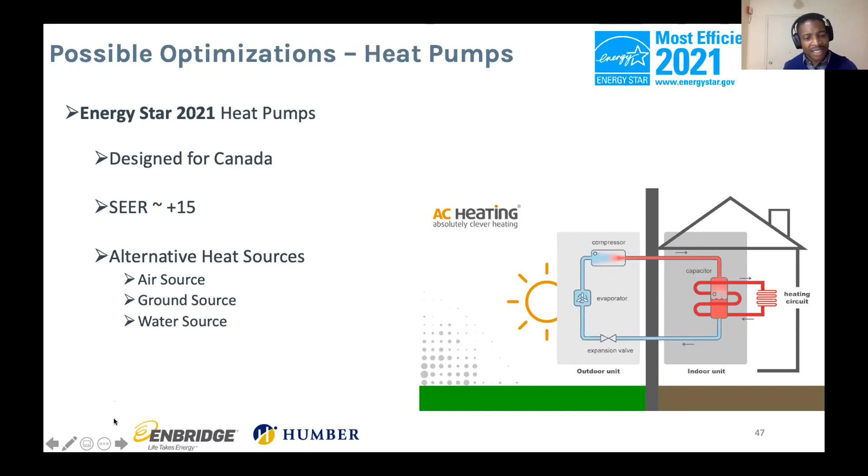Especially on hot days, when your home is particularly warm, you can take that heat from inside your home and put it into a water source, especially if you live near a river or a lake or something of the sort—another free way to harvest heat from the environment around you. So there are several options in terms of heat pumps that can help with your energy cost and savings. These are particularly useful for cottages or people who live in remote areas.

And these use up to 45% less energy. So it really just depends on what is installed, how it's designed, how it's installed, and that may be something that's possible for you.

In these images, bottom right, usually what happens with alternative heating is they'll run some hosing, some piping all around your home under the lawn. So you have to dig up the lawn, then replace it, and it'll grow back the same way it was—but that's how the heat is harvested in that particular case. You just install it once, and then it's fully operational for the rest of the time you have that property.

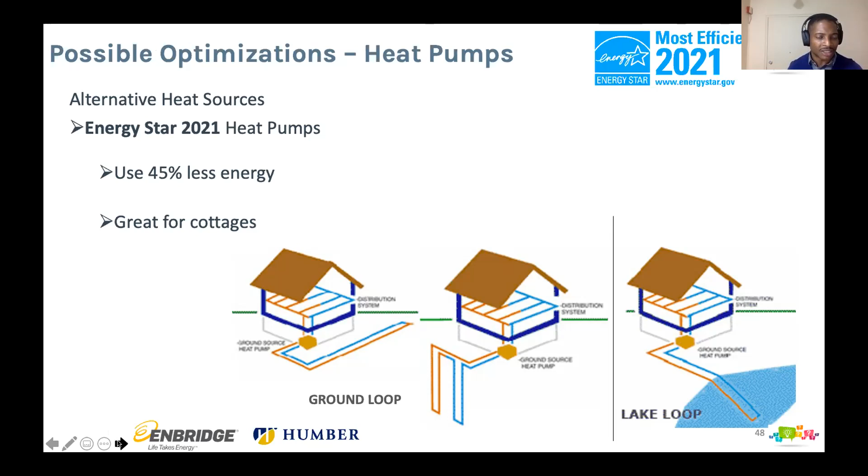Now that brings me to a question: based on everything I just said about heat pumps, is that something you would actually consider installing in your home? I want to see the people who say yes—yes, I'd absolutely install that right away if I had the opportunity. We have about 3 or 4 people saying yes. Then, how many people would absolutely not do that—I would never do that to my home. We have some responses there. And how many people think they'd need more information—maybe, depends, I'm on the fence. Okay, we have some responses there. Thanks for those responses. Like I said, I'll give you some information that may help with that, so those who said more information needed, definitely look out for that.

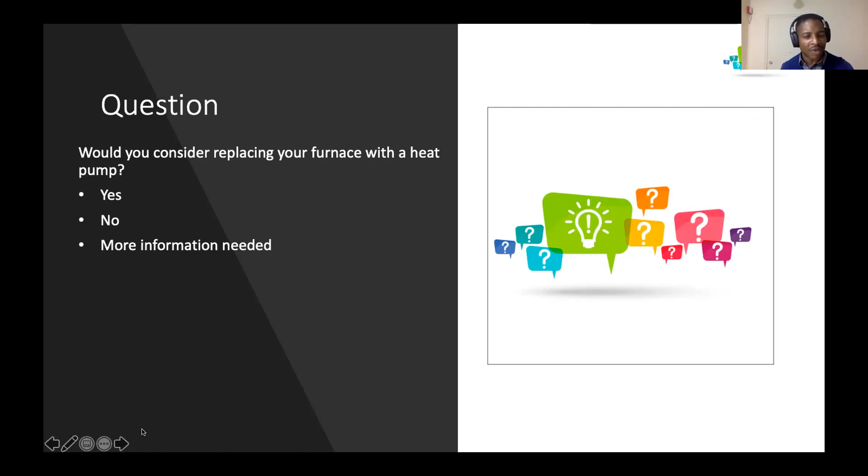Now, as we get into the final part of this section, one thing I want to tell you is that you can buy the most efficient furnace on the market and the most efficient air conditioning unit on the market, but it's not going to be energy efficient and it's not going to save you anything if it's not controlled well. By controlled well, I mean you can have the most efficient furnace, but if it's on all day long because your home is losing heat, or because you don't have it set properly, then it's essentially going to consume the same as a normal furnace, and that's not something you want.

And one thing that can help you with that is your thermostat. Your thermostat really just controls how the piece of equipment works, and your thermostat controls a number of different systems within that. Power is nothing without control.

Now what you're looking at is a Wi-Fi integrated thermostat, and this is the Wi-Fi that you're using now. If you're able to use that Wi-Fi and integrate the thermostat with it, and there are several of those products on the market, it will help you in terms of the control that you have.

Now, there's two main products on the market here in Ontario. There's one made by Google, I think it's called Nest. And then there's one made by a Canadian company called Ecobee, and they make thermostats specifically for Canada.

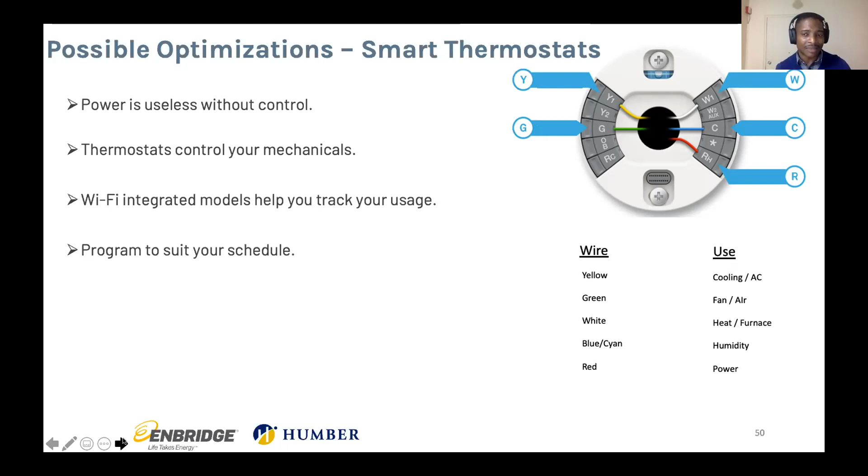So this is essentially very easy. And then on top of that, when I get to the rebates section, there are a number of different institutions that have rebates for smart thermostats as well. They give away money for persons installing those, and once you can provide your receipt for the purchase and installation, that is something you'll be eligible for as well. So that's particularly important, and something you can tap into.

Now, I think Emily mentioned a bit about this in the community energy plan, but solar panels are another option that you can use as well.

So in this particular case, looking at this diagram on the right, you can see that during the day our solar panels are generating electricity and they charge a battery. Then at night, we use that battery to run our lights and all of our systems in our home. This house is completely off grid in this particular case.

The only way it's wired into the grid is for backup. If for whatever reason the sun doesn't shine for one day, or you use more than you plan to, you can use electricity. And this will help you to lower your electricity use over time as well.

Now, the good thing about this is, of course, you have to pay for the upfront installation of the solar panels onto your home. You may have to do some roof work in some cases, but after this project pays for itself, it's all profit. You're getting free electricity and you don't have to pay for that.

And as you can tell, in Ontario, electricity rates have been going up, right? So if you can opt out of that, it's something that will be beneficial for you as well. This is particularly important, and can be helpful to you. I had a client recently who said that his system paid for itself in roughly about 6 years.

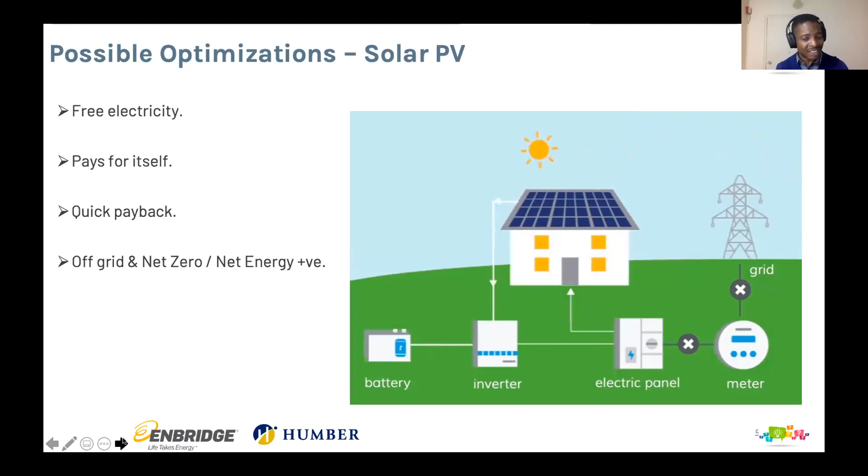Ontario had the microFIT program, where homeowners were able to provide the grid with electricity for a cost. They were paid for the electricity they provided. However, that program has been taken offline, and I'm not sure what's happening with it at the moment. I think they were trying to upgrade it and do some different updates. We may see it back in the future. Regardless, this provides your home with free electricity, so it can be something helpful to you as well.

So we have a question here: would you consider putting solar panels on your roof? Let's see the persons that would absolutely consider that. Okay, we have some responses coming in. Who would not consider that? I would absolutely never do this to my house, no way. Okay, now by show of hands, who would do it if the government paid for some portion of it? Okay, we have some responses there. Doesn't necessarily have to be government, could be some other institution, entity, charity, whatever have you. Thanks for those responses.

I'll provide you with some information that may be able to help you with those decisions as well.

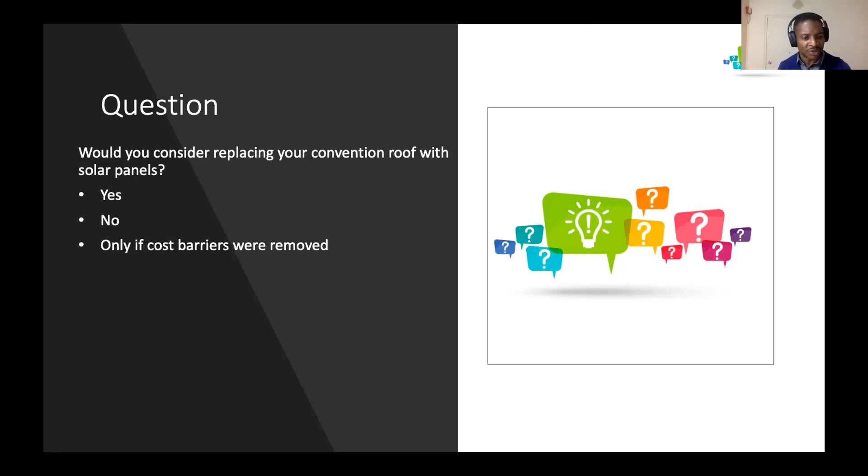So the benefits of optimizing your mechanicals - and when I say mechanicals, I mean your furnace, your air conditioner, your ventilation system, all of that - the benefit really is to give your home a better fuel burn, better consumption in terms of whatever fuel you use, and also a better return on investment. You spend some money, and that will give you a return on that investment.

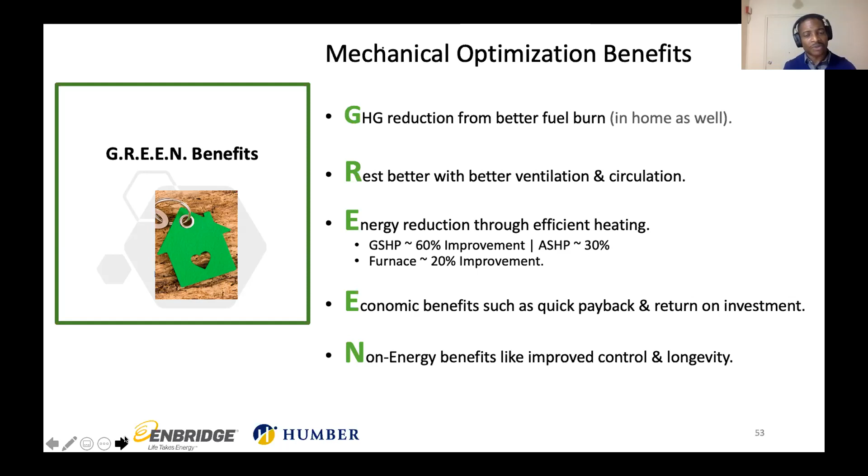For alternative heating - ground source heat pumps, air source heat pumps, and furnace improvements - ground source heat pumps can give you roughly 60% improvement or more. Air source heat pumps can give you 30% or more. A conventional furnace improvement will give you 20% or more. This comes with better circulation and ventilation of air around your home, meaning you're more comfortable and feel better in your home, with better resale value and several other benefits.

Some incentive and retrofit programs - this is one of the few sections that has both. You have the federal program, Ontario-wide Greener Homes. You have some climate funds and not-for-profits as well out there - I think Greenpeace was doing something with this at one point, I'm not sure, I have to look that up. You may also have something at your local city level coming; Garden River and Sault Ste. Marie may have something in the works, which Emily can talk about at some point. Other sources of information include the Federal Greener Homes website - if you're able to find some information there, it can guide you.

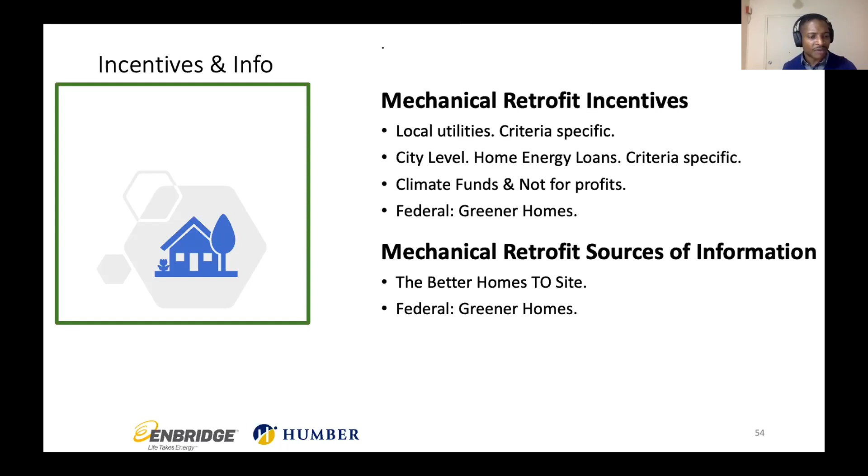In terms of rebates, if you are an existing Enbridge customer, there are some rebates out there, including the smart thermostat rebate. So even if your thermostat was something you wanted to replace on your own, you can get up to $75 for that replacement. There are also different sums of money for heating system improvements, water heater upgrades, and of course a rebate for the audits as well. With those rebates, you just have to provide proof of what was done and show your receipts. Once you send in that information, they will take care of it on their end and send it to you.

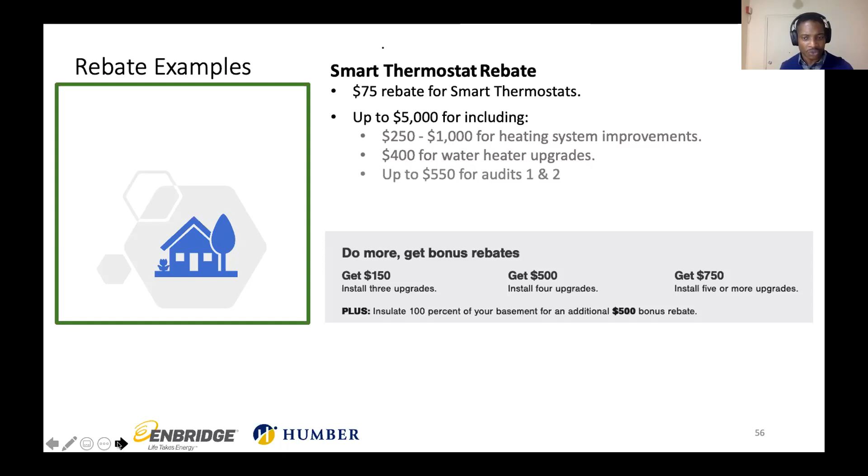So for this section, our second last section, are there any questions that came in?

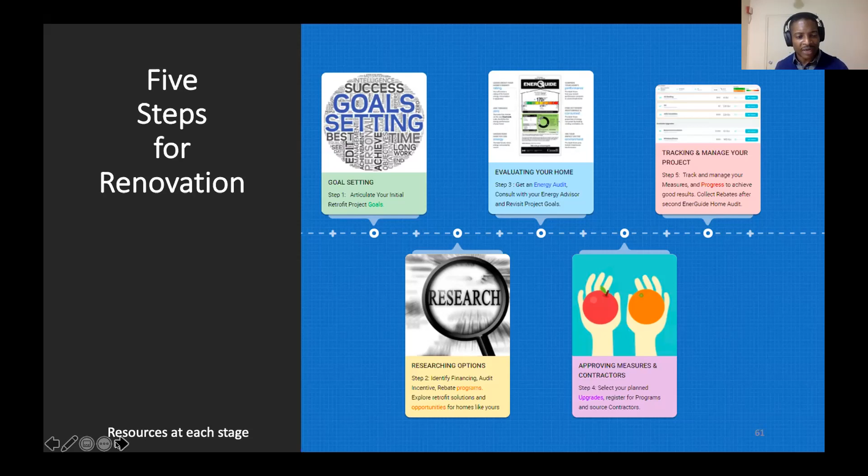Now, I wanted to give you some information. Like I said, that's one of my goals that I wanted to hit today. But I want to give you some information that will help you at each stage.

An example here is step one, where you're thinking about your goals. You can see what other homeowners have done, and what is eligible for your home based on several different things. The Canadian Home Builders Association has a number of different tools to help you.

One of the tools they have is a contractor list as well. So even when you're thinking about this type of work, you can reach out to contractors to see what is possible, what's not possible, waiting times, costs, things like that. You can get more information to help you plan.

In terms of doing any research, NRCan has loads of information on their website, and of course they have product information. That product information includes some products eligible for rebates and other coupons, and some that aren't. They will suggest on that website the best product to use for your given area, your given zone in Canada. So there's a lot of information there to guide you on what's best for your particular scenario. Then once you do that, you get your EnerGuide evaluation from NRCan.

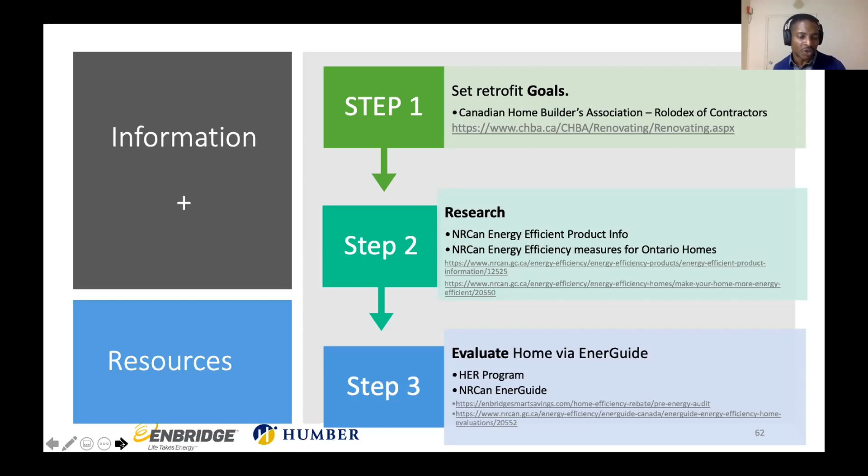You also have information about the Enbridge program, and that's only if you're an Enbridge customer. If you're some other utility's customer, that may be something to look for as well, your local utility that will help you with that information.

Now step 4 is to actually go and hire your contractors, and many cities have a list of contractors that they approve. I'm not sure if you have one of those in this particular scenario, but there are also some other sources of information you can find as well.

Things like the Heating, Refrigeration, and Air Conditioning Institute of Canada have various tips to look out for homeowners. And then there's the Building Industry and Land Development Association renovation guide as well. So there are resources out there to help you with things to look for, and to help you hire the best contractors to suit you.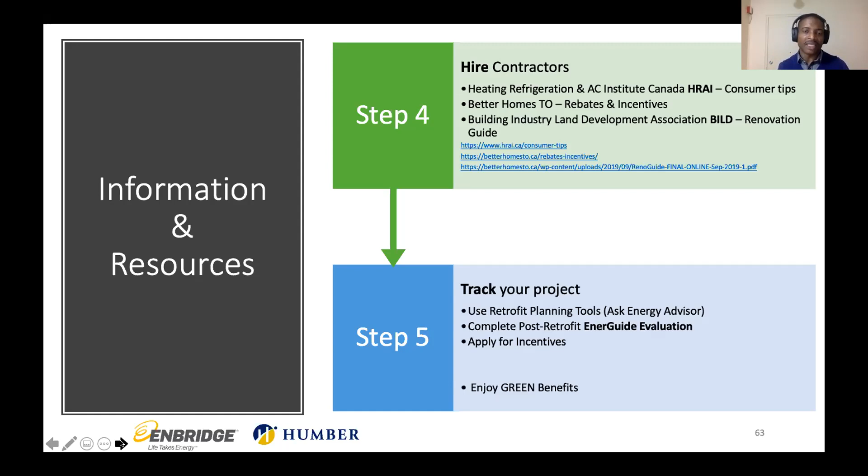The final thing to do after that is to track your savings, analyze your savings, work with your EnerGuide advisor, and then go from there. Apply for your rebates, your benefit grants, your tax rebates—anything of that nature is possible. This really depends on your given scenario. That is essentially the most important information you'll need for planning your entire renovation.

Now that brings me to the end of everything I wanted to share with you today. But I just want to leave you with one sentence, and that sentence is an acronym I call BASIS, or looking at the basis, rather.

BASIS stands for basement, attic, core, your envelope, and your systems—the basement, attic, the entire core of your home, the envelope that's keeping the climate maintained, and then the systems that do that, the air conditioning, the heating system, all of those. If you're able to target those bases, you can get the most efficient home that you can possibly have.

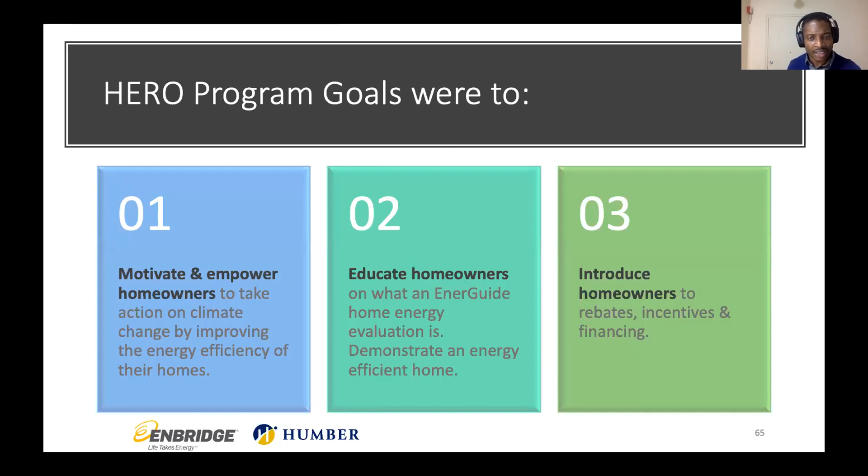All right, just wanted to share that. So my goal today, like I said, had a 3-part goal. I wanted to empower and motivate homeowners in doing that. I want to educate homeowners about what might be available to them in terms of resources. And on top of that, I want to introduce you to various sources of information where you can get information on financing, rebates, incentives, grants, and other things that may be happening as well.

And like Emily said, this is an exciting time. There's quite a bit happening as well. So I just wanted to preface that.